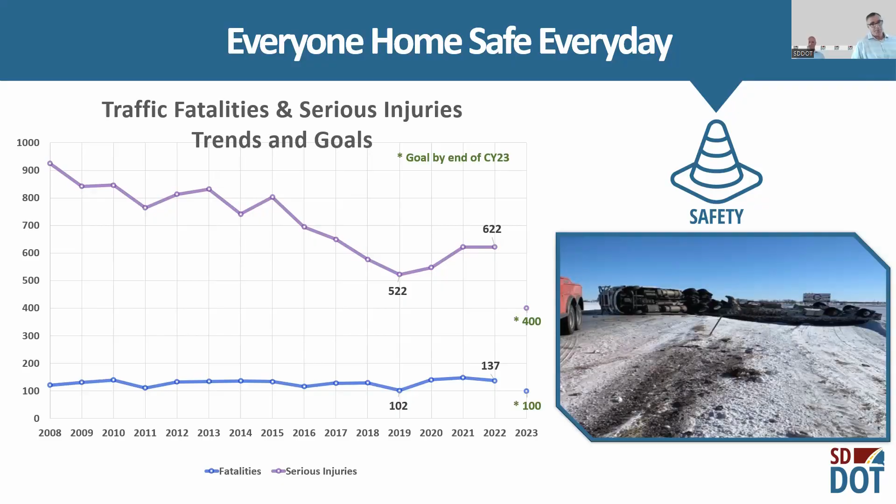I think everybody has hit a rumble strip. If you haven't, we'll take you for a ride. But I guarantee everybody in this room has hit a rumble strip before. And it's maybe a little error on your end. Maybe you weren't paying attention. Maybe you were looking out the window, or maybe a wind gust pushed you over. But it reminded you to get back in your lane.

So as we take a look at those 2 areas, what can we do to help improve them? We're taking a look at new design and innovative technologies trying to improve safety overall.

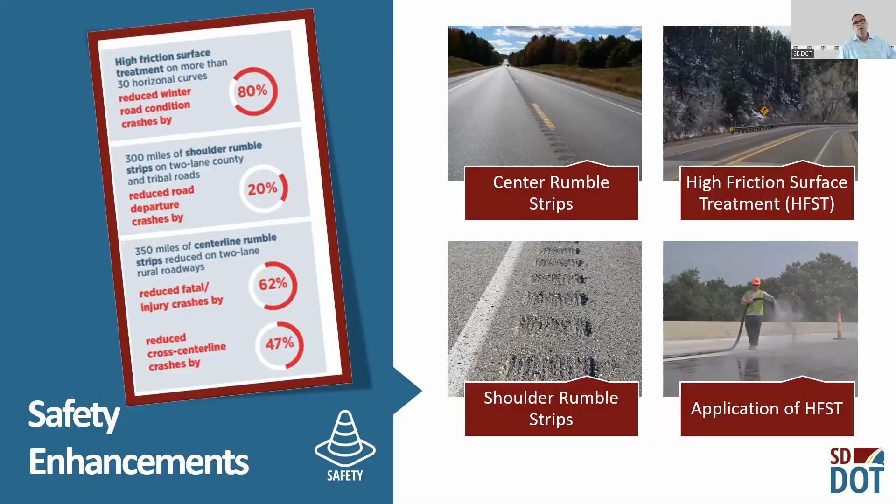Dynamic message boards and Safe Travel USA, the 511 app, are all things that we're trying to do to help improve safety overall. As we think of safety, I think we need to focus on what are we trying to achieve with it. So I want to open it up a little bit after Jason gets done talking about the safety projects you have planned in your region.

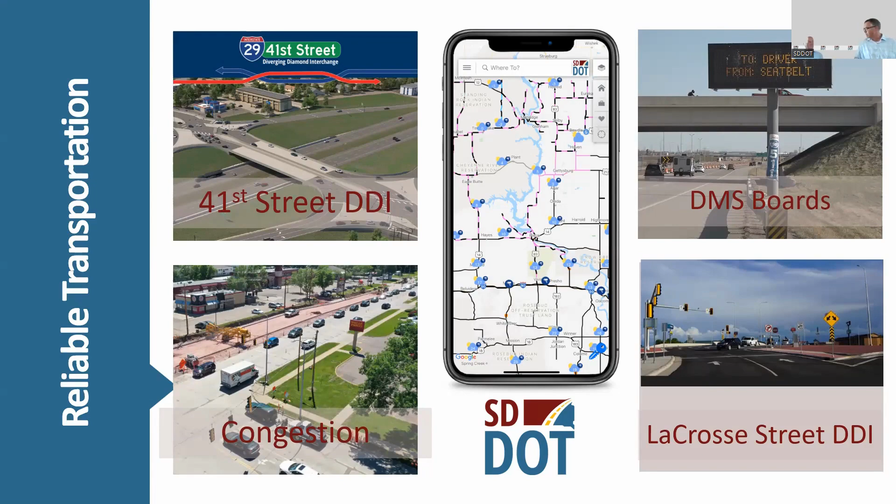Yep, absolutely. Thanks, Mike. So in the Pierre region, we're built a little bit different. We have not as much traffic, but we do have more pedestrian traffic. So that's something that is a little bit different from the rest of the state. We don't have the traffic volumes of a 41st Street or a La Crosse Street in Rapid City. So we're doing things a little bit different.

We're approaching safety from an aspect of what's happening on our county systems. So we're doing county signing projects, improving the sign visibility on those systems. We have a lot of rural roadways, so asphalt roadways with gravel shoulders. Some of our safety projects, we're improving those gravel shoulders, turning them to asphalt shoulders. Those are the types of improvements that we really like to focus our efforts on because we get the most bang for our buck here in the Pierre region.

Pavement marking visibility is one of the things that, based on our customer satisfaction surveys, our customers, our citizens, really focus on and really want. So we're doing a lot of pavement marking projects. But like I said at the beginning, we have a lot of pedestrian traffic as well. And some of the big projects that mean a lot to our constituents are pedestrian walkway paths.

In some areas of the state, we have a lot of folks walking on the shoulders on the side of the road. So we're doing projects to get them off of the road, away from the traffic, and make it safer for the cars and also the pedestrians. We have significant projects going on in La Plant, in Wanblee, in Wakpala, and also right here in Pierre to improve that pedestrian safety. So those are some of the things we're really focusing our efforts on.

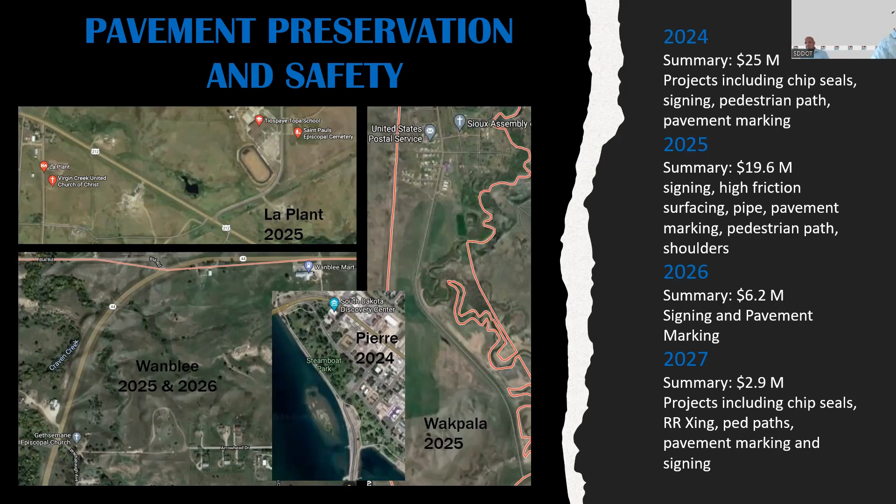So as we think about it, this is where I want to hear from you. How can we get better? Where do you see opportunities, whether it's on the road or the number one fatal crash at single vehicle runoff roadway, at the intersections, and even in the car? I think we all acknowledge the behavior aspects that come into play as people are behind the wheel. So I want to hear from you. If you're willing to share some ideas and thoughts, things you've seen in other states, maybe things you've seen as you traveled across the pond or around the world, ideas and thoughts that you've seen and things that are working well. Is anyone willing to share some ideas?

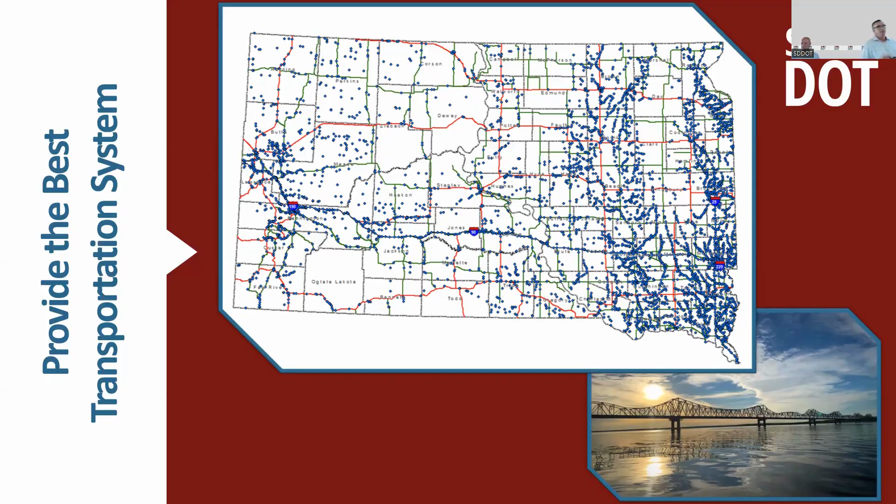As we look at the state system alone, our condition, we do a measurement of good, fair, and poor. Bridges are inspected about every 2 years. Our goal is to maintain 95% of our bridges in good or fair condition. Now, it doesn't mean a poor condition bridge is unsafe. Our team will go out, and if there's an unsafe situation, we will post it, we will close it. It just means that asset's getting to the point of diminishing returns. It needs to get replaced at some point—you can no longer maintain it. So we project we're going to be able to maintain that 95% into the near future.

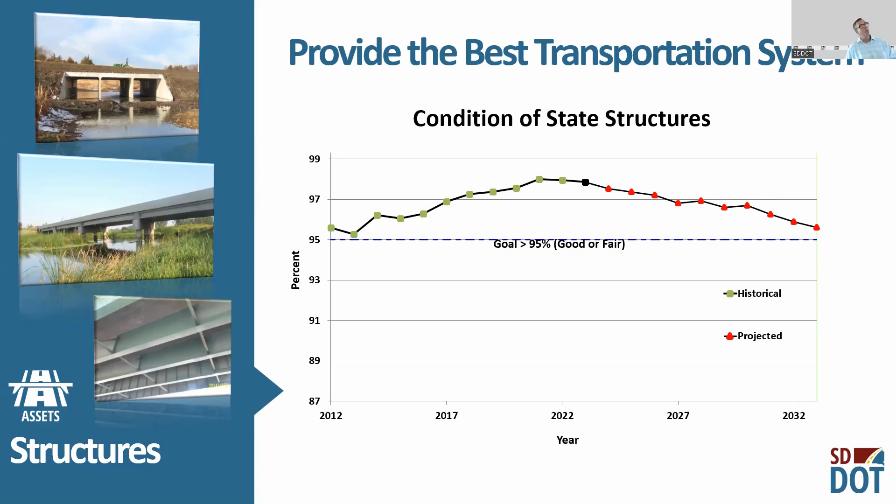Through investments like the Platte-Winner Bridge, the upcoming Forest City Bridge, all these are huge investments that are going to take a large chunk, but by managing those assets adequately, we feel like we can maintain those. And it's through innovation, through finding new ways to do things—whether it's trying to build in more resiliency, so if a flood does come it doesn't knock out the bridge, or using stainless steel rebar in our bridge decks to reduce corrosion so bridges last longer, or using unmanned aerial systems, drones, to help us do inspections and catch things earlier so we can mitigate them before they become a problem.

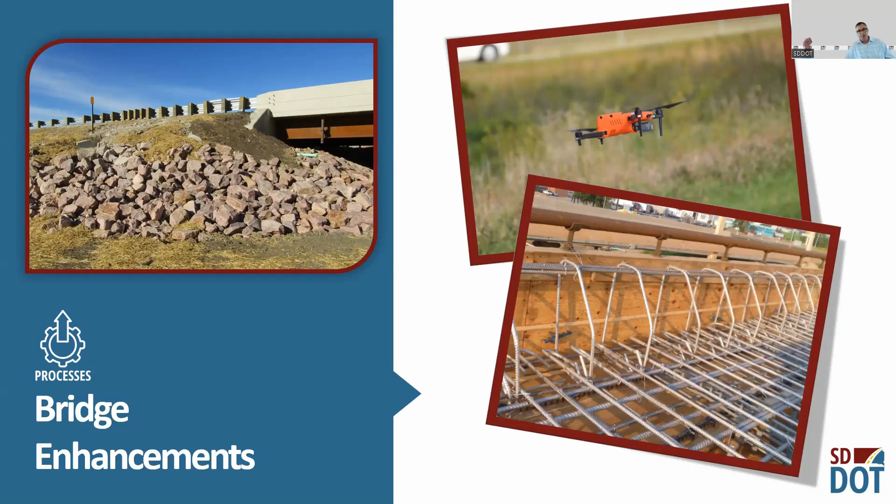I know our bridge engineer would say, well, once you talk about bridges, you're done. But the reality is a bridge is just something over water—and sometimes troubled water, for those of you that are Simon & Garfunkel fans. But pavements are important too, right? Without pavements, you don't actually have a transportation system. We have 8,800 miles of state-owned pavements and roadway network in our state.

Again, we try to maintain no more than 20% of those pavements in poor to fair condition. We use 4 different thresholds in our pavement measurements—you can kind of see where we're at. We want it to be green and blue, right? None of that yellow creeping up into the 20% line. As we look into the future, we anticipate we'll be able to maintain somewhere near that. Now, from a pavement standpoint, 2033 is a long ways out. Obviously, winters like we had last year can do a lot more damage on a road than a nice, easy, gentle winter. So we're anticipating we're going to be able to maintain those, but as things change, we're going to have to react to it.

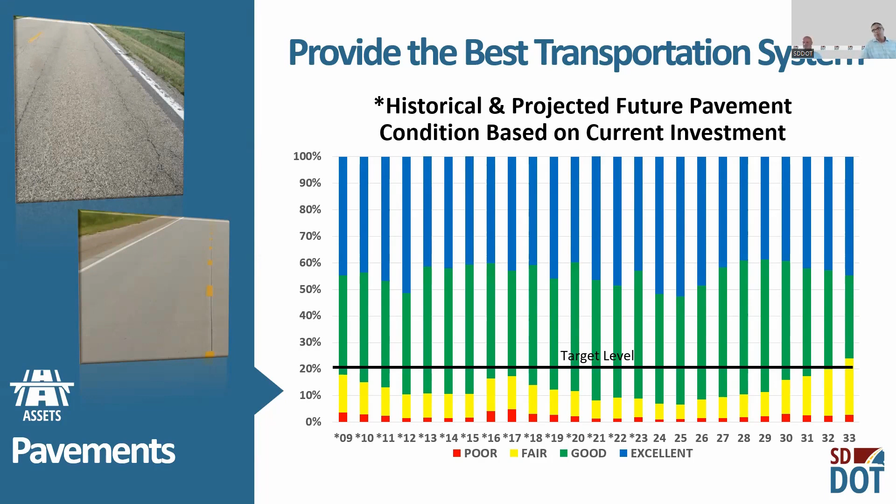We're trying innovations on our pavements as well. We're looking at notched wedge joints—I talked about how we put in the rumble strips down the center by notching them, trying different techniques and innovations on the centerline so we can get those built better, so they last longer and perhaps don't cause as much damage with those rumble strips. We also have our next generation concrete pavement, in the lower right-hand corner, another innovation we're trying to use to improve the ride and sustainability of that concrete pavement.

In the upper left-hand corner, that is not a fish locator—I know somebody thought that was one of our fish locators and had the wrong picture in there. Actually, what we're trying to do there is ensure that as we pave that asphalt, we're rolling it in a time frame where the thermal properties, where the asphalt is still warm, but we can get that compaction, get the density that we need. It's called intelligent compaction. The driver is actually on there, and the different colors represent the temperature of that pavement where his roller has been, to ensure we're getting the best compaction we possibly can as that asphalt is laid. Again, new innovations and techniques that we're trying to use to improve the transportation system and make sure things last longer.

Now, Jason, I know we've got a lot of work coming up in the Pierre region.

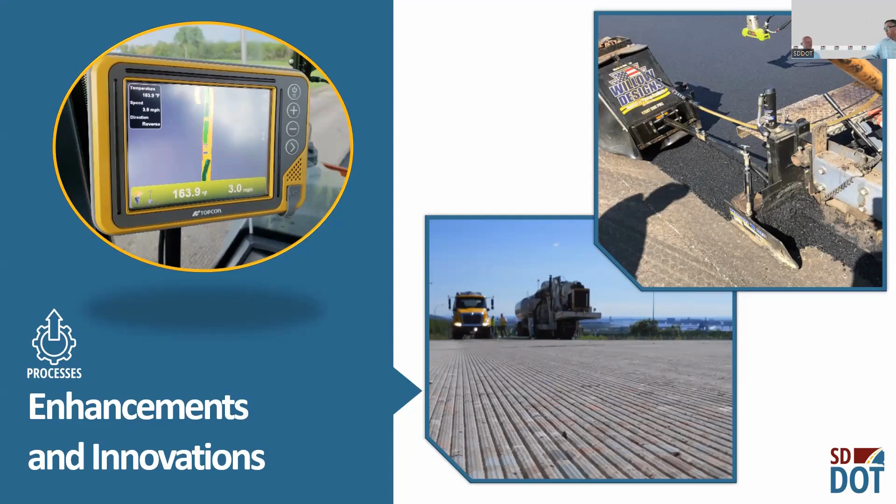This slide represents the major categories of construction that we're going to experience here in the Pierre region. Overall, we have $566 million worth of investments that we're going to be making over the next 4 years. That's a significant investment - larger than our whole program was not that many years ago.

Before I get into the totals and more details, I want to point out that in the back of the room there is a tentative STIP list. I hope you were able to grab one. In addition, there's a map showing all of the projects we have scheduled for the next 4 years, actually beyond. The map is color-coded by year: projects in red are fiscal year 24, green are 25, blue 26, and purple in FY 27.

Now, one question for you though, Jason. Yes, sir. Why is there gold up there? You didn't mention that. Well, that's a great question, Mike.

The department identifies issues with our roadways, and we have a large group of teams that go out there and look at our roadways every single day. These roadways shown in gold are actually roads that we know we're going to have to do a project on in the next 8-10 years. So we've identified them as being in our long-range plan. We're looking at the data, the traffic, the cracking patterns, how the road is interacting to try and figure out exactly what we need to do with that roadway.

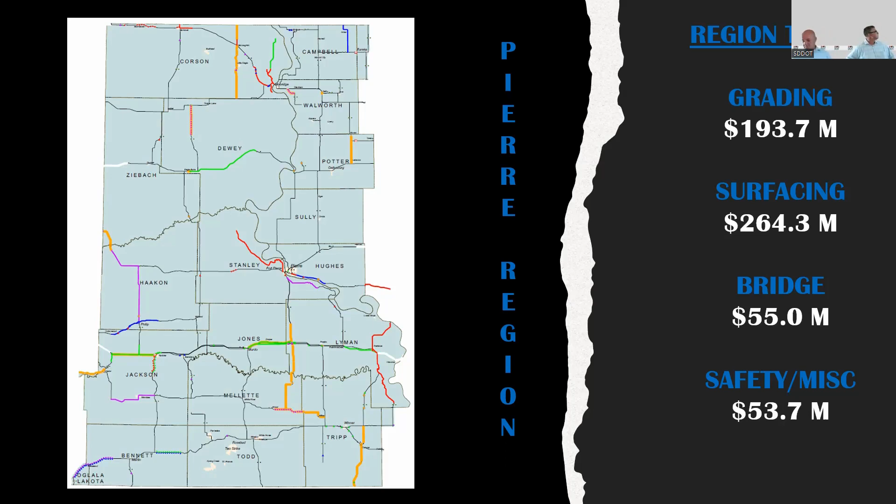Starting with our bridge work, there was a gentleman in the back who talked about our big program and how beneficial that has been to some of our counties. We have over $50 million of work, and each one of these stars represents a location where we're going to be either replacing or rehabbing a bridge in the next 4 years.

These are all color-coded in the same format as our interactive STIP. In 2024, we have 16 structures we'll be working on. 2025, 19 structures. In 26, the numbers drop down a little bit. 26 and 27, we have both 9 structures on the state system in both of those years. But in those out years, years 3 and 4 in our STIP, we don't always have all the information about our county structures and when they're going to hit, so I fully expect those numbers to jump up as we get more data from our local transportation system. Those numbers will likely be higher in the out years.

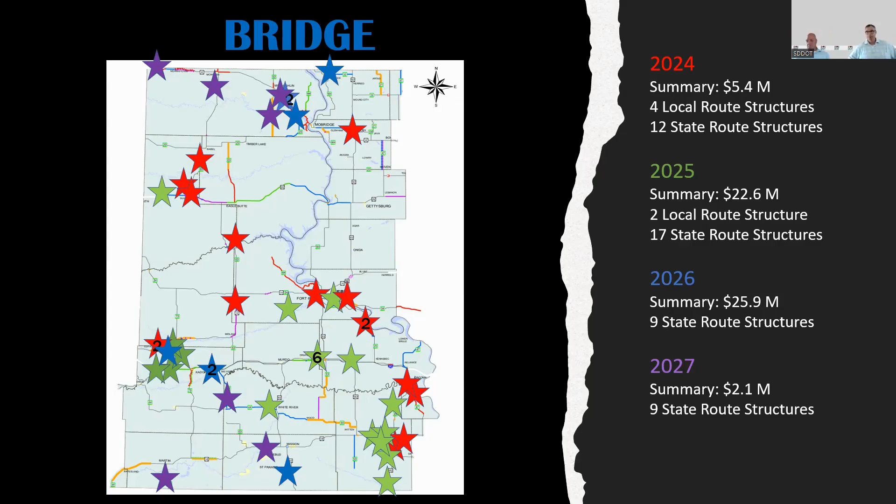Is that definitely right, Mike? Yep, definitely right.

So as we think about transportation, the pavements, the bridges, and the assets that are out there, I'm going to ask a question so I need some help from you. What have you seen work? How can we get better? Whether it's our pavements, our bridges, or maybe other things - lighting, signals, things you've seen in other states. Things we're doing well, reinforcement, or hey, you didn't do so great on this, here's something I think you should be working on. So be thinking about that. Hopefully everybody's got their cheat sheet in front of them, taking notes and ready to go. So anybody have any ideas and thoughts that we can do to help improve our infrastructure?

There's so many stoplights, but one thing that really helped is those flashing yellow lights. If that thing's flashing, you better get slowed down, because you ain't gonna make that line. That's helped us tremendously. We sure appreciate those, especially when you're fully loaded, I assume.

Yeah, when you're loaded and going down, and that light's flashing at you, don't try to beat that light, because you're not going to make it. And the flashing lights - I'm thinking those, we got a warning sign on the side of the road before you get to the signal, saying when flashing, be prepared to stop. Helped us a lot. Good, I'm glad to hear that.

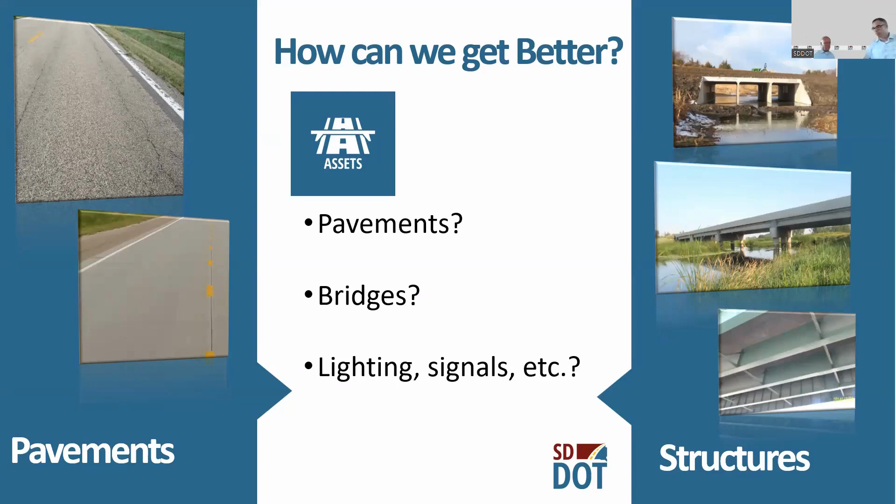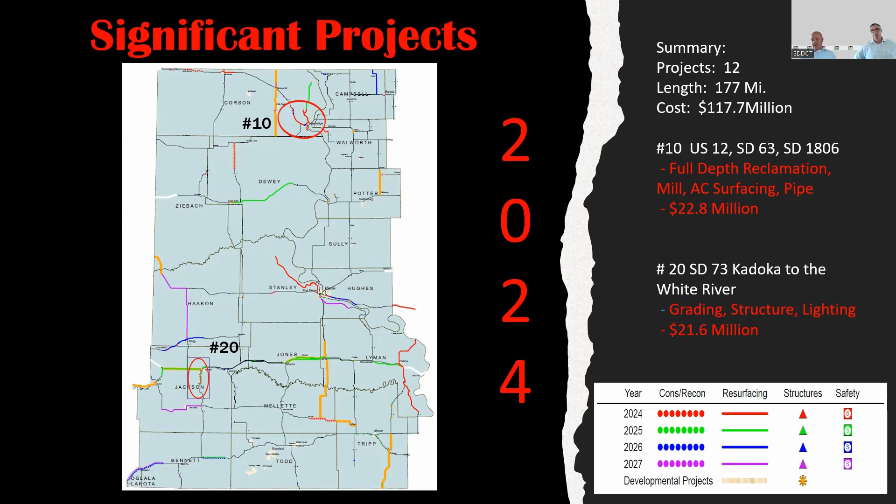There's going to be a lot of work going on up there, and we'll have some real nice roadways when we're done. The next project we have is project number 20, that's South Dakota 73 from Kadoka south 13 miles to just past the White River. We're going to completely regrade that road. It currently is narrow, doesn't have much for shoulders, so we're going to widen that roadway and take out some of the vertical and horizontal curves. We're going to have a real nice road going south of Kadoka when that project is finished. That's about a $21 million project at this point.

Moving forward to 2025, we're going to be working on over 200 miles of roadway in the Pierre region alone for over $107 million. The first significant project I want to touch on is project number 72, that's US Highway 18 from South Dakota 73 over to Antelope Road, just east of Martin. We're going to completely regrade that roadway as well and provide interim surfacing, then the following year we'll come back and put surfacing on that roadway.

One that some of the folks in the room here from town might be interested in is project number 84, that's the reconstruction of Euclid Avenue in Pierre from Sioux Avenue all the way through town to the north edge of town where the road becomes 4-lane divided.

That project is currently slated to be approximately $16 million or just over. At this point in time, we've done a little bit of engineering. We think it's going to be a 3-year project.

Now, that's a lot of time for the traveling public in Pierre to be disrupted, especially when it's a north-south route and most of our traffic is east and west. So there's going to be some disruptions, but we're working on some innovative ideas to try and cut that down into a 2-year project.

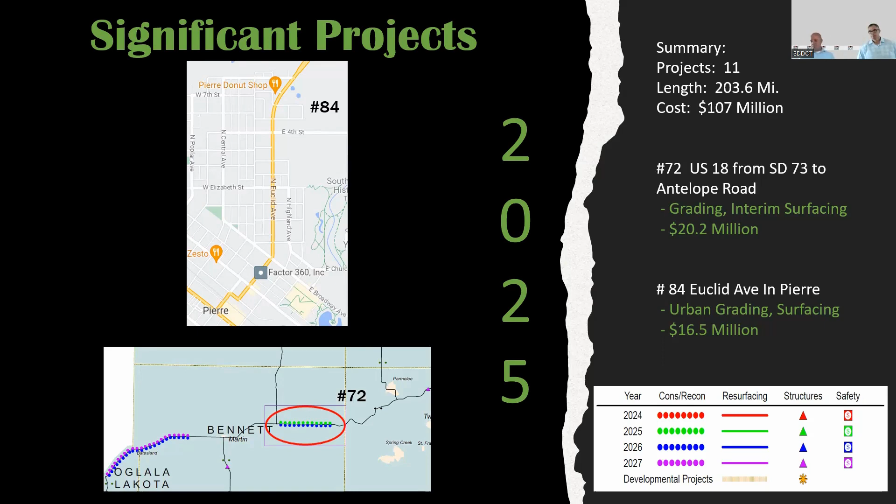In 2026, we're going to be working on 132 miles of road. Two of the significant projects we have is in that same area just west of Mobridge, project number 143 on your list.

You probably can't see it very well on the map, but there's a tiny little blue dot right in the middle of all that red work. What that is, is an intersection project. Just on the east side of the casino, Highway 1806 and Highway 12 intersect, and it's right on a hill, on a grade of a hill, and there's some sight distance problems there.

So what we're going to do is move Highway 12 a little bit to the north and cut off a portion of that hill and improve that sight distance, because we've had some safety issues going on in that area. So that's going to be a real nice project when we get it done, and it'll improve the safety significantly in that area.

And then again, on Highway 18, project number 139, another reconstruction project. We're going to do some grading and structure work, and this will be west of Martin. We also have a structure replacement project on that job. That'll be about a $40 million project.

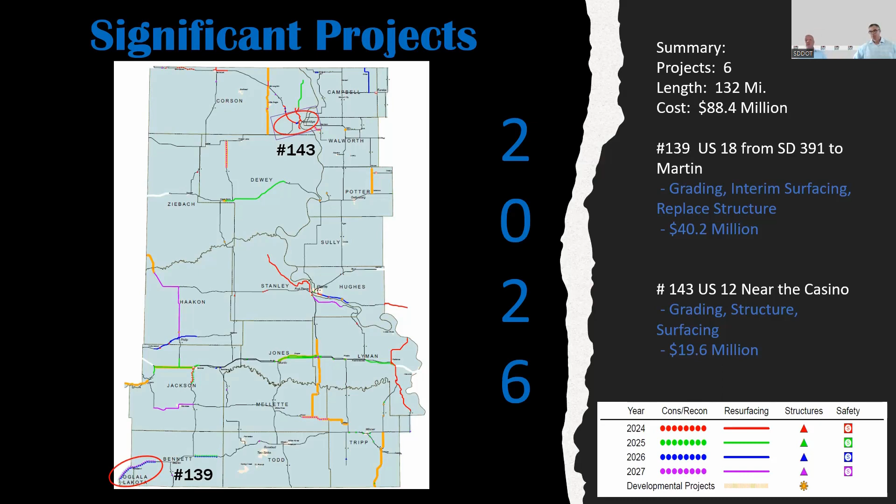So, and then last but not least, in 2027 we have 3 significant projects that I want to touch on. Overall, this fiscal year we have quite a bit of work already slated, $145 million worth of work.

The first is project number 200. This is a project that came about as a result of this meeting. This is a grading project from South Dakota 20 on South Dakota 63, from 20 south towards Eagle Butte. We got comments from the Cheyenne River Tribe saying this is a problem for us. We really feel like our citizens that live up here are in danger. So we looked at it, we looked at the data, and we agreed with them that yeah, we do have some issues here.

So we're going to reconstruct this. Again, we'll make it wider, better shoulders, and hopefully eliminate some of those run-off-the-road type of accidents that Mike mentioned earlier. Moving a little bit to the south, project number 205 is the reconstruction of the interchange straight south of Fort Pierre here on the interstate at exit 212.

We got to looking at that. We have the structure ready to be replaced. We have some vertical clearance issues at that site. So we're going to raise that bridge and regrade the ramps, the approach pavement, and make that a really nice project when it's all done.

That in and of itself will probably be a 2-year project as well, so there'll be a little bit of an inconvenience. We've been working with the folks down there at the coffee cup to try and mitigate some of those inconveniences, and I think we have a pretty good plan in place to try and make that a good project.

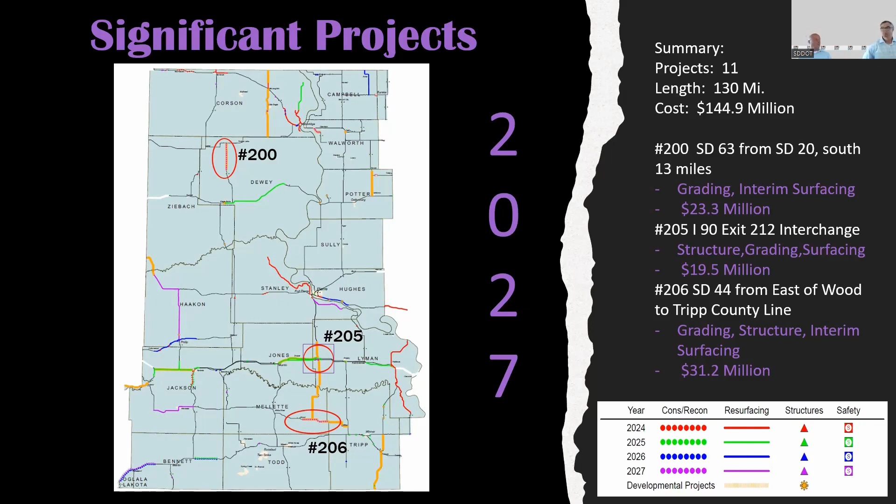Great. Well, again, I think we've had some good comments regarding safety and how we can improve our infrastructure. And again, I want to open up for comments on specific projects, or maybe something that came up as you were sitting here tonight thinking about safety or infrastructure. So again, another opportunity to hear from you. Concerns you got, maybe it's one of the items you have here or something that we're totally missing on the list. If you have any ideas or thoughts, please raise your hand and Mark will bring the microphone around to you.

Couple up here. That Highway 73 project, Kadoka south. Yep, when you cross that river, there's a spring hole in the middle of the road. Are you going to change that road at all, or have you guys fought it? I was just wondering, are you going to try to fix it, or are you going to move the road, or try to fix what's there? When you go on the south side of that bridge, south and going halfway up that hill.

Okay, so the project is going to go slightly south of the river. I'm going to refer to our area engineer, Doug Sherman. He's going to have more information on the site that you might be talking about. I know they built that patch three or four times, and they say there's a spring hole right at the road.

Okay. Yeah, what we have there is a pretty massive slide area. Our geotech people have been watching that pretty close. And the grading, by the time we get down to that point, we're almost kind of tying back in. I think the approach we were going to take is we may do a little work to just kind of enhance it, but where we've got it stopped moving now, we really don't want to just open it up and disturb it either. So that's what you're going to kind of see there. That's right on the tail end of that project. But I know that slide area very well, and it's been a thorn many times in my career.